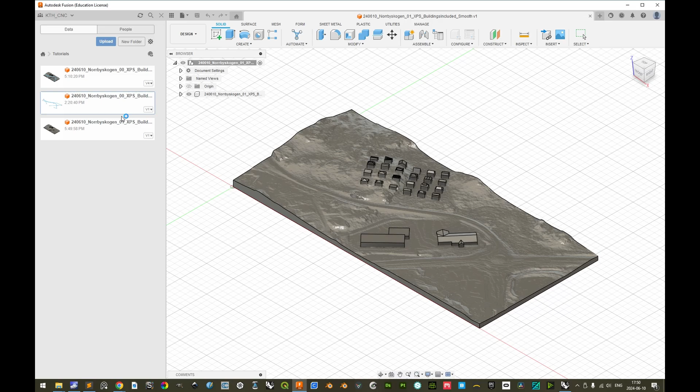So let us upload the exported file. It might take quite a while, but now it has been properly uploaded. We can double click to open it. While still in the design workspace, we can right click this previously exported and uploaded polyline document with lines to be engraved for property line and roads. So we'll insert this in the current design, and we click OK. Now we change to manufacture workspace.

We'll create a new setup. The first thing we should make sure is that the origin point is correctly placed, at the top corner, where the two axes are tangential to the edges of the stock material in the positive axis direction. So where the x-axis and y-axis both point along the edge and not where one points outward of it. So this corner here.

In the second tab, we'll make sure that stock side offset is set to 0 mm. Make sure not to change the default units in all the fields, taking care only to replace the digits that you want to replace. So let's change this to 0. Top offset can be set to 1 mm, it is sufficient. The bottom offset in this case must be set so that the total height is approximately, within 0.1 mm or so, 100 mm. So what do we need to add? 22.33.

22.33, 23 or so. When you have a material sheet such as 100 mm XPS, it is advisable not to increase the top margin excessively, instead having excess margin on the bottom, because anything that you add on top will increase the time it takes to mill and contribute to waste of material. These stock dimensions are to be taken note of, because these are the ones you prepare your physical stock to.

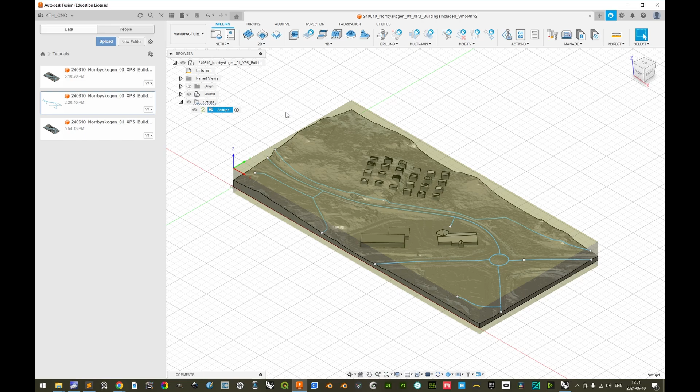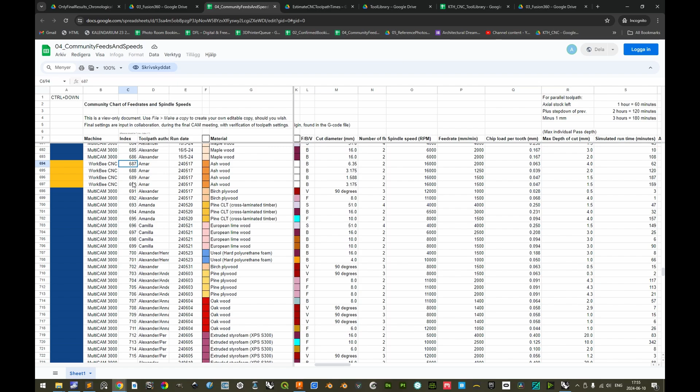Go to your preferred web browser and go to cnc.kthcnc.se. It's only a URL to a Google Drive. Here you can enter the reference photos subdirectory, and in here you can browse between the models that students previously have milled. All of these reference images have indices attached to them so that you can easily, in the Fusion 360 subfolder, the CAM software that we use, and the community feeds and speeds datasheet, find the toolpath settings that were used for a specific reference that you find of referential value to you.

In this case, we have prepared these sets of 4 toolpaths that are of great referential value for this specific set of tutorial toolpaths. So we will be using these settings for these 4 toolpaths as our initial values. We'll see if we need to tweak them. For the first toolpath, we use the router bit product ID 23, and it's a 3D adaptive toolpath. So we can go back to Fusion 360 and add a 3D adaptive clearing toolpath.

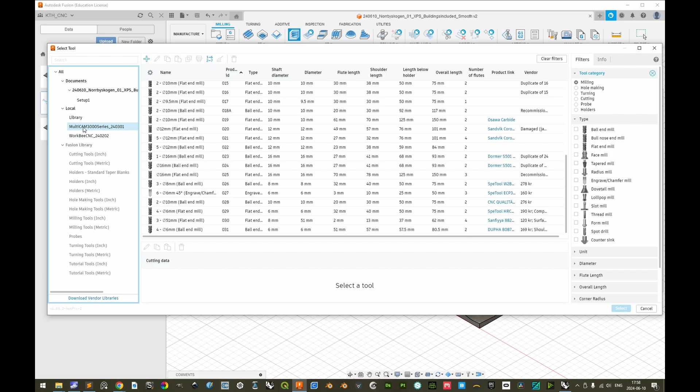We can select a tool, and having previously imported these two libraries, we can go down to the Multicam 3000 series one, number 23. Very good, this is the one. Take note here, it is fairly short, so it only has 68 mm from the tip of the tool to the bottom of the collet or tool holder. So we'll need to make sure that this tool does not extend further deep than 67 mm or so.

We can select this, and then we can see the datasheet. We can go back here to the spindle speed, the rotational speed of the spindle. We have 5000 RPM, which is the default value. That's very good. Make sure to only change, if necessary, the spindle speed, and never ever change the ramp spindle speed from the default value. The ramp spindle speed value will be erroneously interpreted by the CNC machine, and it will run amok, ramping its feed rate instead of its spindle speed. In this case, 5000 RPM as default spindle speed is good.

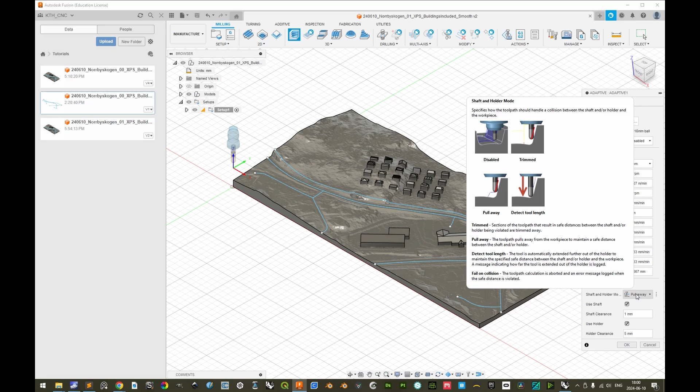The cutting feed rate we can change from 1000 to 4000. It is good procedure to only change the digits that you actually need to change instead of deleting everything here or replacing it, since a unit here should be properly retained. As per the reference, if you hold shift and scroll here, we can see that we have pull away, and we will enable shaft and holder and have pull away as the active mode, and then change the shaft clearance to 2 mm.

Thus increasing the safety margin between the non-flute shaft segments and unmilled material. We can go to the second tab, and here we don't need to change anything. We can have no machining boundary as per the reference, and we'll have rest machining active, which means that this toolpath and succeeding toolpath will work in collaboration, and the succeeding will take into account what the previous has milled away so as not to mill the same volume twice. And we see that we have rest machining here.

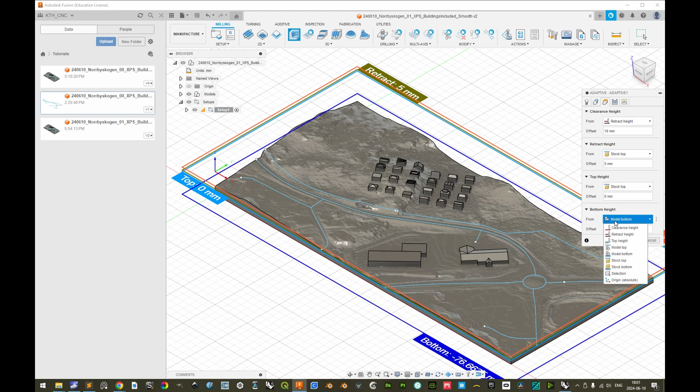We can go to heights, and here it's important that you remember that the tool distance from tip of the tool to the collet was merely 68 millimeters. So we'll need to make sure that the bottom height from the stock top is offset by no more than -67. That's 1 millimeter clearance. It's adequate.

Then we'll go to the fourth tab, and we'll make sure, since this is XPS, a type of plastic, extruded polystyrene, that we don't want to go conventional, because that would increase the risk of rubbing against the plastic, thus increasing the risk of it melting. So we'll do climb as direction, and the maximum roughing step down can be set to 20 millimeters. The fine step down here can be set to 10 millimeters. That means that we leave 10 millimeter vertical increments for the succeeding toolpath, which is okay.

We disable flat area detection. It adds very much to the computation time of the generation of the toolpath and does not serve us any purpose. As for the stock to leave, we'll make sure that we leave 4 millimeters of radial stock to leave. This will automatically, by parametrical dependency, change the axial stock to leave to 4 millimeters as well.

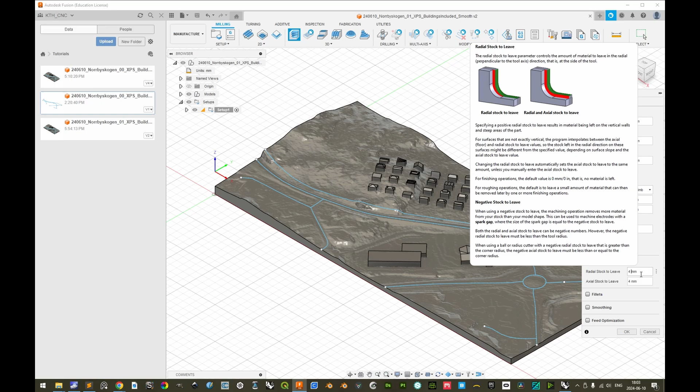When milling with a ball end mill in XPS, the surface gets very rough. And it is not a problem, because we are going to define the final surface with the succeeding toolpath, but we want to make sure that we have a sufficient margin left to the actual model, so that any potential areas which get ripped away significantly do not infringe on the actual surface.

In the fifth tab, linking, we do not need to change any settings. Those settings that we needed to change are here in the comment, so it can be good to take this reference and simply follow it. Generally, the later the reference, the more reliable it is, owing to the amassing of collective knowledge. Alright, we can click OK to generate.

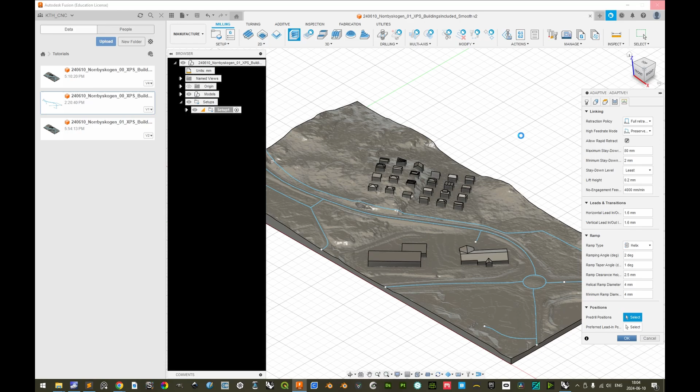Alright, this toolpath is simulated to take 1 hour and 15 minutes. The actual time it will take to mill will significantly deviate from that. The statistical maximum to be expected is a time factor of 1.8 for 3D adaptive clearing toolpaths.

If we go to Rhino and open Grasshopper, and if we go to grasshopper.kthcnc.se, and go to definitions, then fabrication, then estimate CNC toolpath times, here there is a Grasshopper definition as well as an image preview of it that you can use to more easily compile the simulated times and the expected actual times, and we'll do so now.

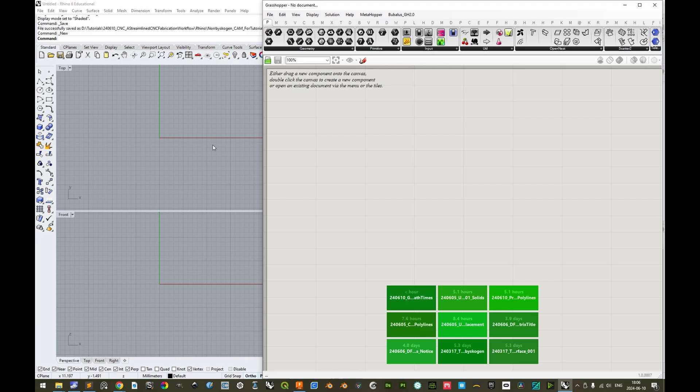So we'll simply open that, and then for the first toolpath it is 1 hour and 14 minutes. And it's a 3D adaptive clearing toolpath. So it's expected to take 2 hours and 14 minutes.

Generally, it's good that the clearing toolpath or the initial toolpath does not take more than half of the maximum allowed toolpath time of 6 hours in total, because this initial toolpath will not define the end result or the final surface, and having an excessive amount of time for the clearing of excessive material and a relatively shorter amount of time for the final surface might force the final toolpath to be significantly shortened in time.

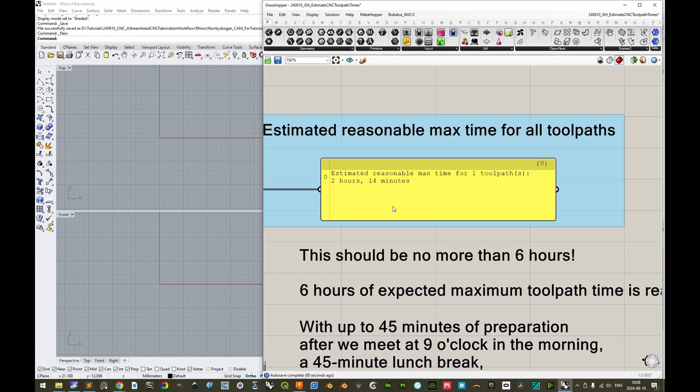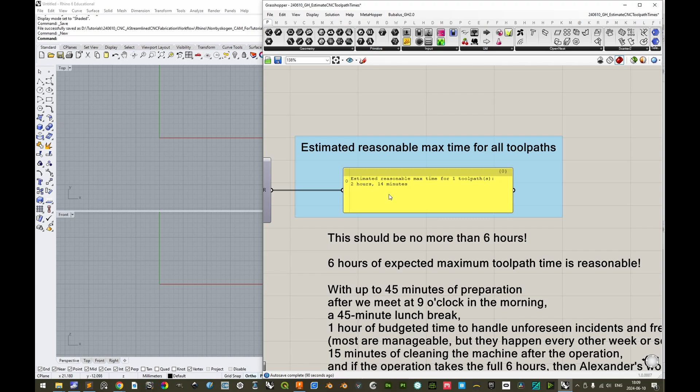So if this would have been significantly longer, perhaps more than half of 6 hours, so more than 3 hours, then it would be wise to reduce the size of the model so as to more properly define the end result with the succeeding final toolpath. Alright, but here we have it, 2 hours and 14 minutes. This first toolpath is expected to take that as a maximum actual milling time.

And then we want to do the one that actually defines the surface. And if we check the reference here, we see it is a 3D parallel one using tool product ID 19.

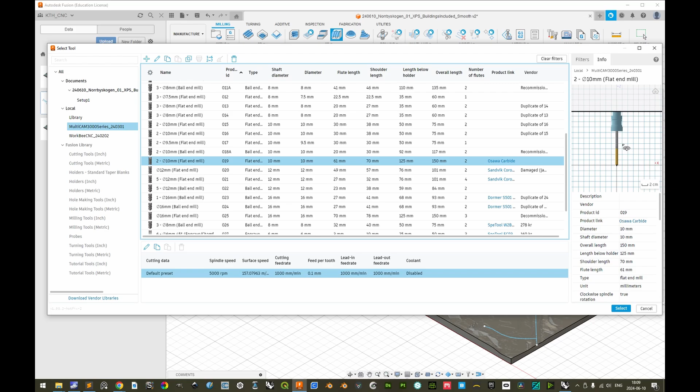So we'll go here and 3D parallel, and we'll select another tool, and we'll select from the Multicam 3000 series, tool product ID number 19. It's a very long tool with a relatively smaller diameter. It has a length below holder of 125 millimeters, so we don't need to take into account any specific bottom height restraint due to the fact that the length below the collet or the holder is more than the material itself, 100 millimeters.

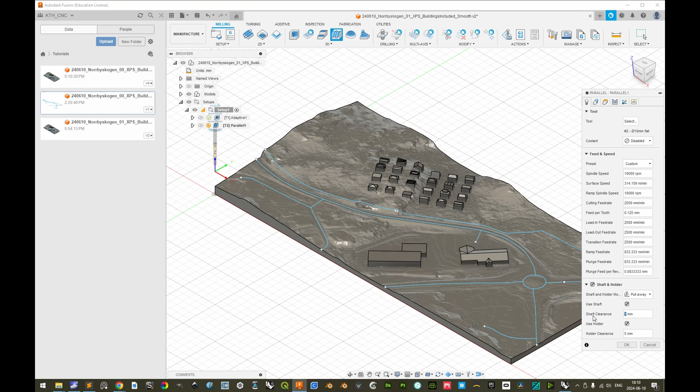We can click select. The spindle speed as per the reference should be set to 10,000 and the cutting feed rate to 2,500. It is good procedure to enable shaft and holder and making sure that it is not trimmed but pull away. In this case, we might see that the difference between the lowest point and the highest point is less than the flute length, but should they not be, we still want to activate this as a safety measure. It makes sure to generate a toolpath where the tool is pulled away from any potential collisions between shaft or holder and unmilled material. We'll go to the second tab, Geometry.

Here it's important with a 10mm tool that we have from the tool center on the boundary, which is the silhouette of the model, that we allow an additional offset of a little less than the radius. So 5 is the radius, so 4mm additional offset. This is to make sure that the tool defines as much of the total area as possible, but still not being allowed to pass past the edge, which we would have allowed it if we would do 5 or 5.5 or more. So we'll do 4 and no more.

Rest machining can be kept disabled in this case because we are following up a 3D clearing toolpath with another type of toolpath. The 3D adaptive clearing toolpath is always calculated from the top, going towards the surface, while the parallel toolpath originates from the actual surface. And if there would have been excessive material left, then one perhaps would be required to do multiple passes, but that would still be offset from the original surface. So we can leave rest machining disabled here.

In the third tab, heights, we don't need to change anything since the range of the tool is more than sufficiently long. And in the fourth tab, passes, we need to make sure that the direction is set properly. In these circumstances, it's okay to go both ways. Preferably one should go only one way, that is climb milling, so as to reduce the risk of the router bit rubbing against the plastic material when it goes the other way. But generally, and historically with this specific tool and this specific material, it has worked very well to go both ways. And going both ways will save some time, allowing us more time to decrease the step over or add perpendicular passes. So let us do both ways.

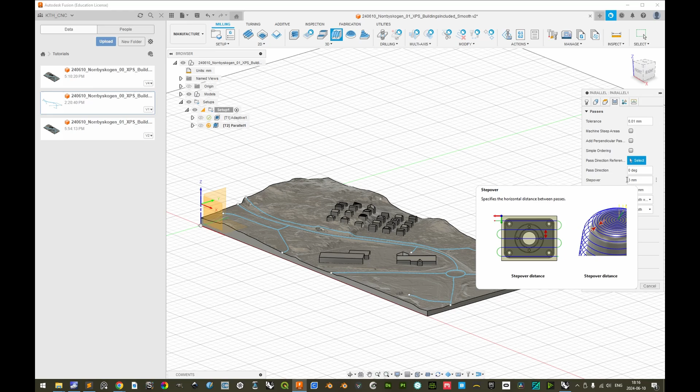As for the step over, we can actually start with a fairly high value, like 3mm, a little more than half of the radius. The good thing about authoring parallel toolpaths is that it's a very linear endeavor. If a step over of 3mm takes 3 hours, then a step over of 1.5mm will take 6 hours, etc. We'll allow it to be 3 at this initial stage, and we have no multiple depths, we have no stock to leave. And as for the multi-axis, we only have 3 axes, so we leave that as it is. For the 6th tab, linking, we leave everything as it is as well. So we'll go back to passes, 3mm step over, we click OK.

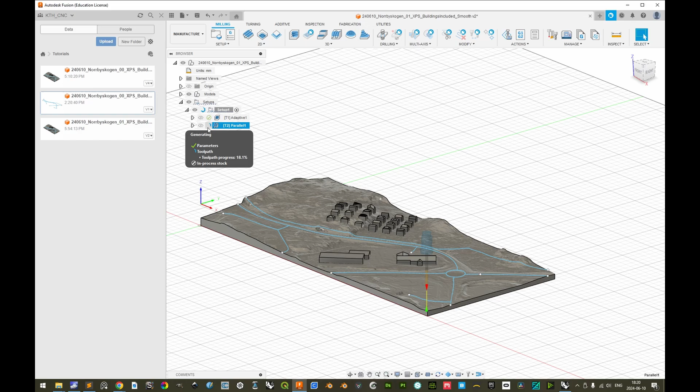And while this icon does not tell much, when you hover the mouse cursor above it, you see that we have 13.8% progress. It's not a linear thing. And now we have 18.1, so you can more properly see that it actually progresses. Alright, very good. Now we see already here an approximation of the simulated time. Let's input it into Grasshopper. So we had 1 hour and 33 minutes. And the type of toolpath is a 3D parallel and we go both ways.

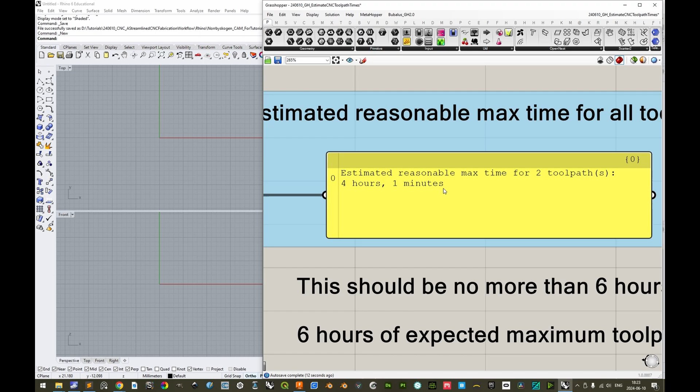So now we see here that the estimated reasonable max time for these two toolpaths is actually only 4 hours and 1 minute. So here we can actually experiment a little. We have 2 additional hours approximately that we can utilize for the second toolpath. And we see it is only 1 hour and 33 minutes, this one. So I would say that we can utilize this time at our disposal to add an additional pass.

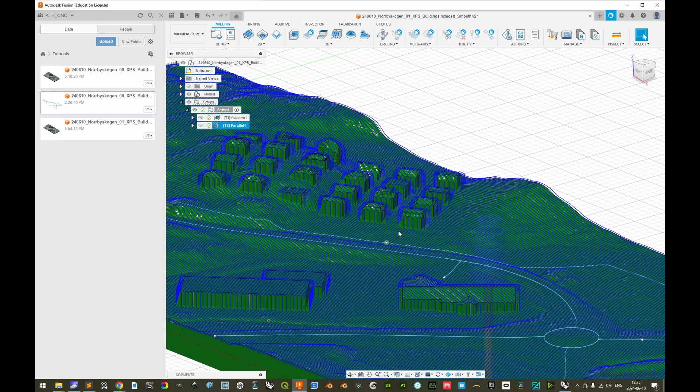You will see here, if we simulate this, go to Actions and Simulate, and then we can jump to the end of the toolpath, make sure to disable the visibility of the toolpath, make sure to enable the visibility of stock, change the colorization of the stock from operation to material, and then optionally you can change the material from ceramic to wall paint, which is a little less glossy. You can do however you want.

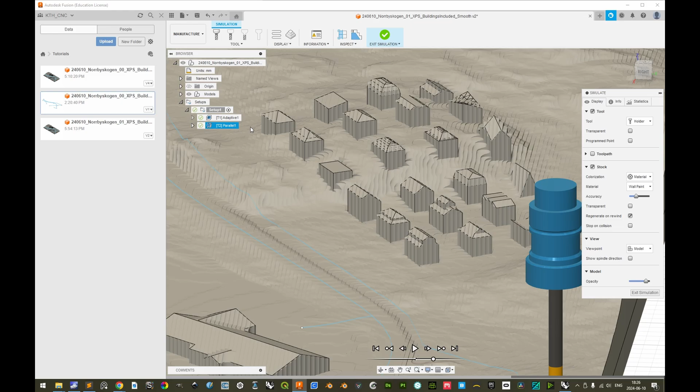But if we now hide the models, we see a resemblance to the original model, definitely. The vertical cusps are very accentuated. It is of course due to 3mm being a step over that is quite large; a step over of 2mm is more moderate, and a step over of 1mm is very fine.

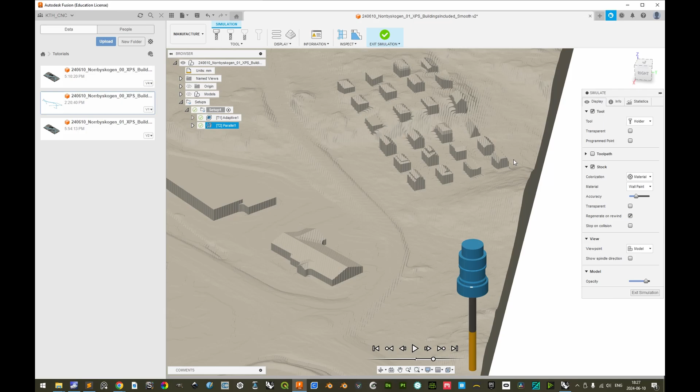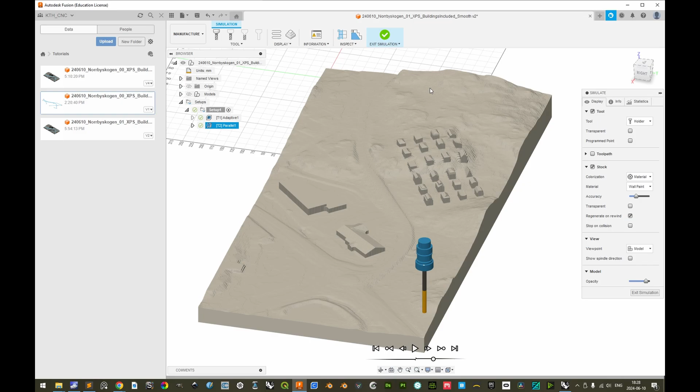But since we are using XPS, which has no direction of fibers, etc., instead of decreasing the step over, which might be a more viable option with solid wood, in this case I think that the vertical cusps will be better handled by adding a perpendicular pass. By adding a perpendicular pass, it will of course double the toolpath time, which in this case we are within budget to do. It will not change the surface of the model as much as the first pass did, but where the cusps are the most expressive, those are also the areas where a perpendicular pass does most benefits.

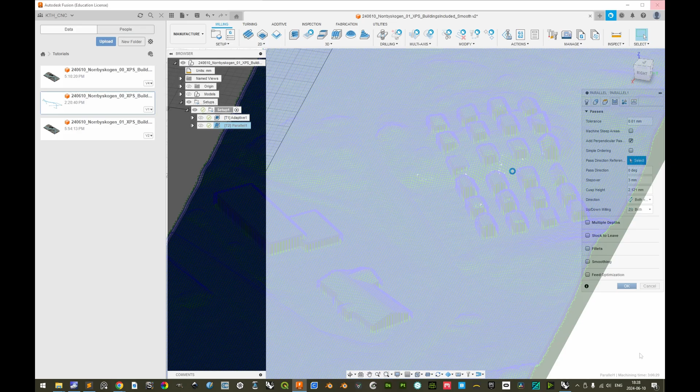So let's see, if we exit the simulation, and if we double click on the icon there so as to properly enter the settings here again, if we go to passes, the 4th tab, and add perpendicular passes, and that is the only thing that we do now, and click OK. Alright, we see here that we have an approximation of 3 hours and 6 minutes.

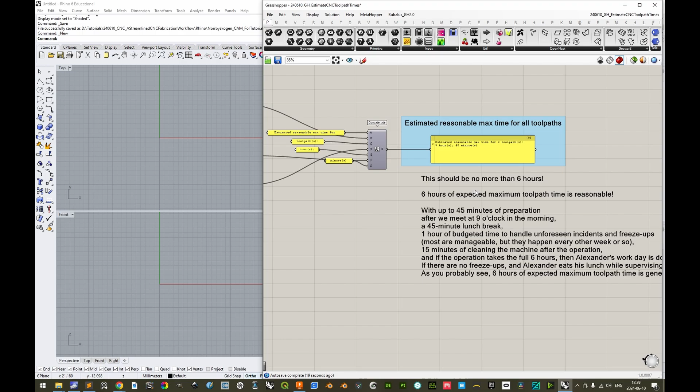So let's go back to Grasshopper, and it was 3 hours and 6 minutes. So we have 3 hours and 6 minutes. And this gives us approximately 5 hours and 48 minutes to expect as a reasonable maximum time it takes to mill. As such, we still have 12 minutes for the 2 succeeding trace toolpaths, but those generally take a very short amount of time. Very good.

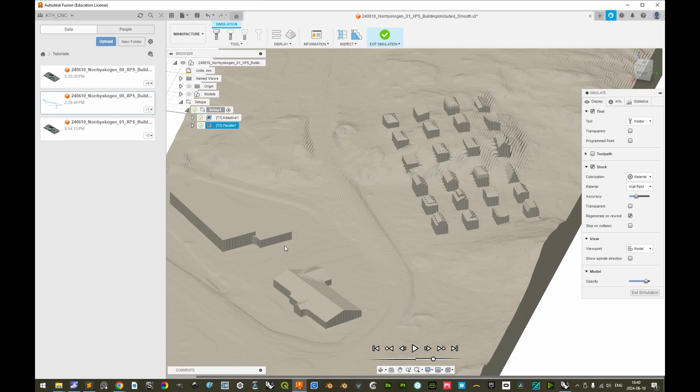Let's go back to Fusion, and we should also simulate just to verify how it looks. So let's go to end of toolpath. We will see how it starts by going parallel to the x-axis, and we see the vertical cusps that we previously saw. And we'll see now that it starts to do it along the y-axis, if it significantly improves. We saw it improving significantly or not. You'll be the judge. Whether or not the perpendicular pass was worth it in terms of improving the final surface is a question left to you.

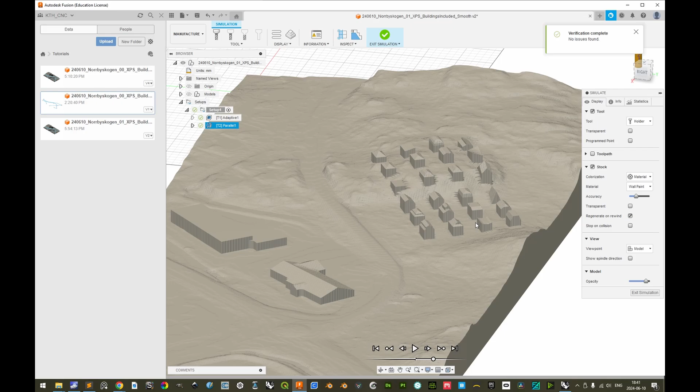The main important thing is that the toolpaths that you prepare are safe to run, that is, no critical collisions, and reasonable in time, that is, not an expected time to mill exceeding 6 hours. Let's leave it like this, it looks good. So let's exit simulation, and then we could either simulate and verify collisions now or after the 2 last toolpaths. As long as you do it, you can do it whenever in the process.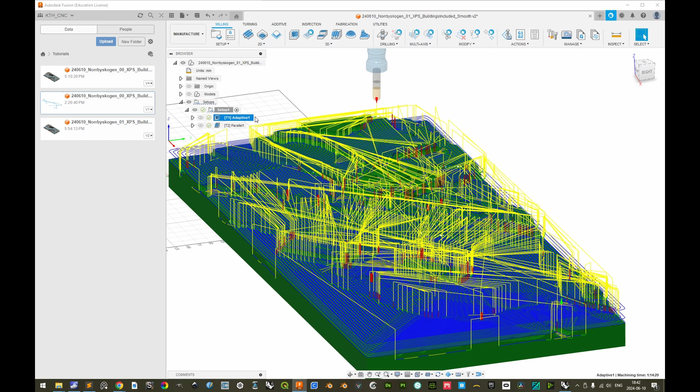If you do it early on and you identify a critical collision that you either way would have to readjust the settings or so, then it might have been beneficial. But in this case, we can simply do all 4 of them and then one after each other verify for collisions. If we show the models again, then we can actually do like this. We can open a previously authored CAM document here, and then we can copy the 2 toolpaths that we did for these very lines in that model.

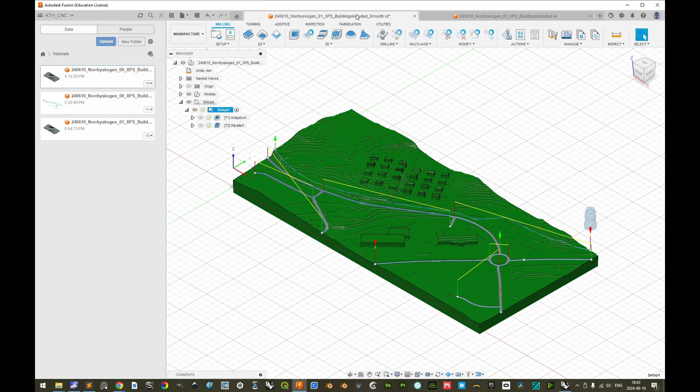So we'll double click here, and then we select this one as well as this one, and we'll right mouse button click and do copy. And then we'll go back to the previous document, and then we can right mouse button click the setup 1 here, and do paste. And here we have them. Having copied these, we can close the other document. Now we can open this 3rd toolpath, and we can make sure to delete the curve selection there, because that curve selection resided in the other file.

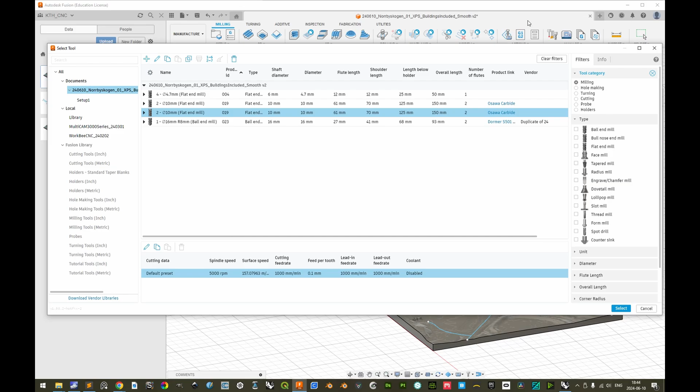And then we go to the 1st here, and this specific tracing is tracing of the roads. And we'll be using tool number 19, the very same tool that we used previously. It is shown here as a separate instance, but they are the very same. It's just because they resided in different documents initially. And then 10,000 as spindle speed is adequate, 2,500 as cutting feed rate is adequate as well.

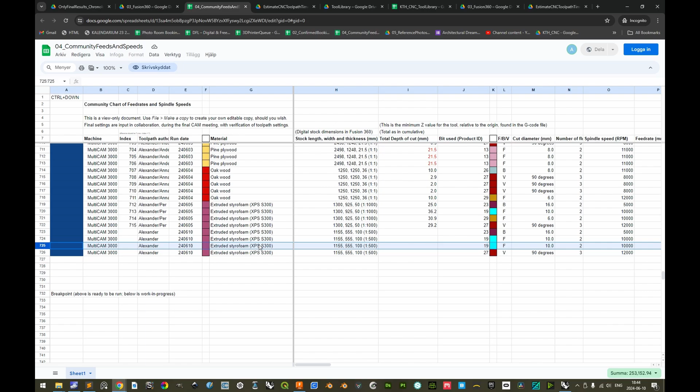We also see this if we go to the reference, and if we highlight this one, we have 10,000 and 2,500. That's the feed and speed of our reference here. And we also have a suggested axial offset of -1 millimeter.

So we'll see here, if we go to geometry and first of course select the curves, and it was the road curves, these. So let's make sure that we expand this and expand the contents of the reference document, and then expand the sketches, and then we select the roads. Very good. As for the heights, there is nothing we should change.

As for the passes in the 4th tab, here we have the axial offset of -1 millimeter. We'll see if this looks good. We can also do less than so, and in linking we don't need to change anything, so we can just go back to passes, verify that everything looks good, and click OK.

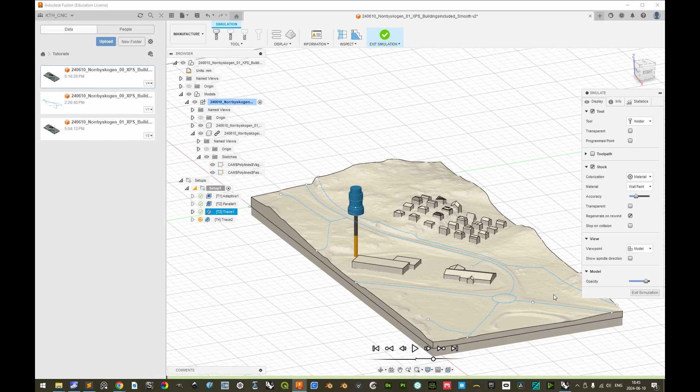Let's go to actions and simulate to see how this looks, and then we can hide temporarily all of the models, and then we can go to end of toolpath. Yes, this looks very good. Alright, we can exit simulation, and we can show the models again.

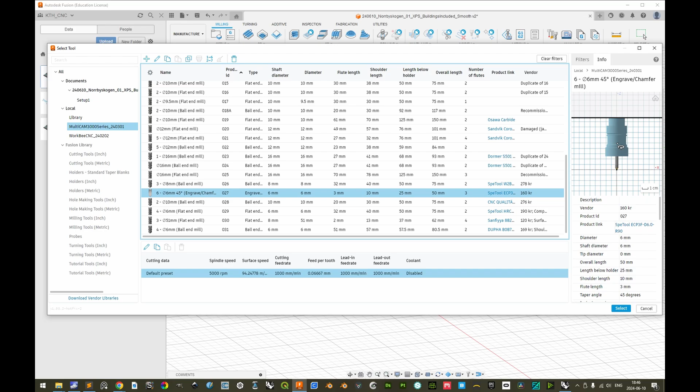And as for the 4th and final toolpath, I think that we should exchange not only the curves, we can delete those as of now, we should change the tool to a V-bit, and a V-bit we only have one of, the 45 degree one with a total of 90 degrees, and we can select this.

And then let's see here, as for the spindle speed, let's check the reference. Let's highlight the fourth and final here. We have a reference here of 12,000 RPM. So let's do 12,000 RPM. And then as for cutting feed rate, we can do 2,000.

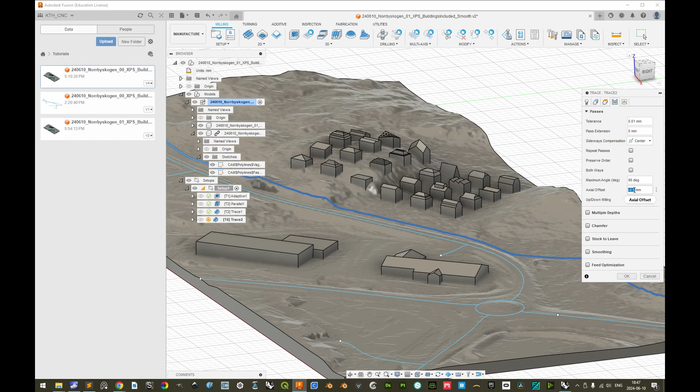And then if we select the geometry, we should select the property line. Very good. And then as for the heights, we don't need to change anything. But for the passes, here it is 0.5 millimeters descended. With a 90-degree tool, that means that the groove should be 1 millimeter in width. It also depends on the actual slope of the route it takes. So let's try negative 0.5 millimeter.

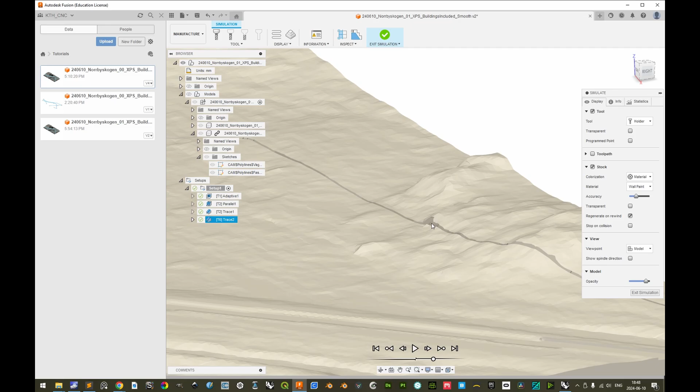Okay. And let's go to actions and simulate and jump to end of toolpath and hide the models. And here you see what I said about the slope, that when there is a significant slope, it will widen. Here, of course, it looks very accentuated because there's a different hue between the unmilled material and the milled material. In the actual result, it might not look this accentuated. The line looks good. Yeah, it's a little wider at some parts, but I would deem this definitely good enough.

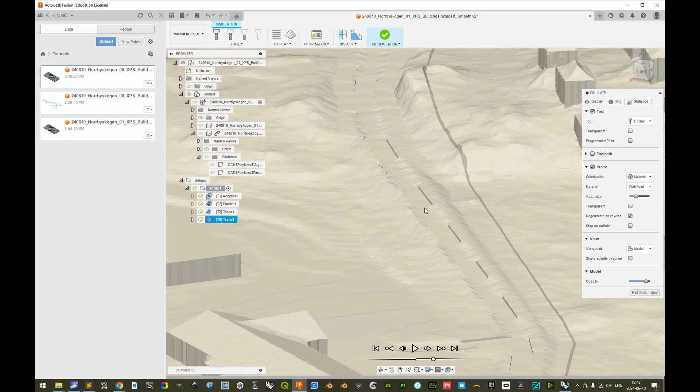When simulating individual toolpaths, the other toolpaths are significantly deteriorated. As here, you see that the road engraving with a flat end mill looks very weird. But if we actually do simulate that one and jump to end of toolpath, we see that it looks good.

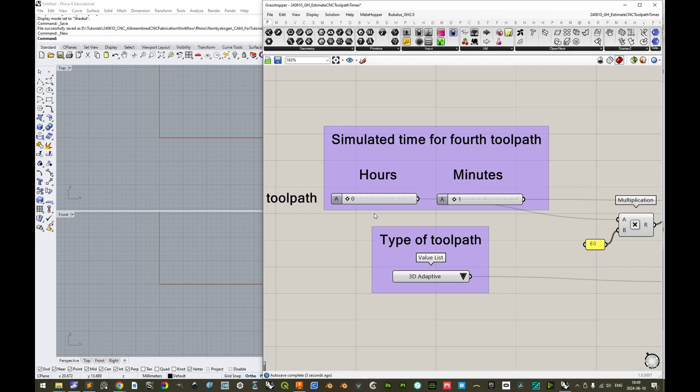Alright, let's make sure that we input also the time of this. We have 2 minutes. Only 2 minutes, and it's also a 2D operation. That's good. 2D operations have very small time deviations. And the last one was 1 minute, I think it was. Yes, and it is a 2D operation. So we have 5 hours and 51 minutes of expected reasonable max time.

That's good. That means that we can go back here and go to actions and simulate, having selected only the first one there. And we have at least one error. We want to show the issues later on. But first we can go to statistics and we see here the time it takes to mill and the machining distance. And now we can go back to info and we have as of now 20 collisions.

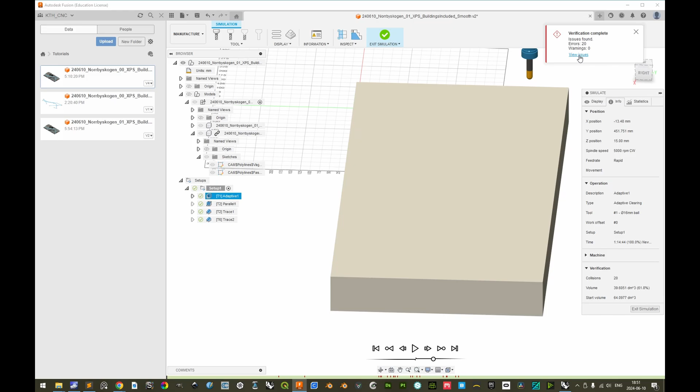We can view the issues either by clicking this link, or if this has disappeared, you can go to information and issues. And we see here that we have 20, and all of these are rapid move collisions. Fusion 360 is material agnostic and does not know what type of material we are actually milling. For Fusion 360, this might as well be solid wood, a harder material. In this case, we have a very, very soft material.

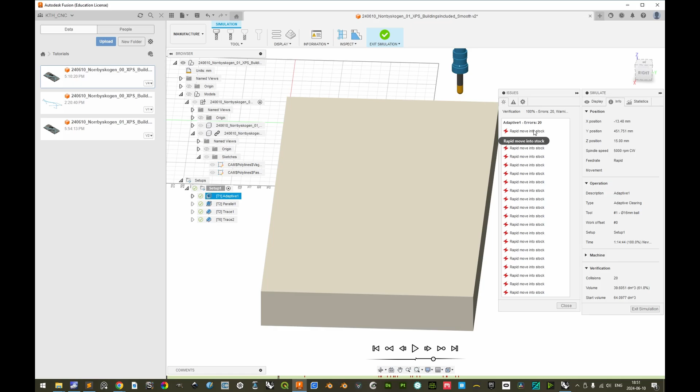If it does a rapid move into the stock, it generally is not critical, but we will need to visually verify this, of course. So let's click the first one. And I think that it's sufficient to simply look at it from like this, because if it registers a collision here, then it is the preceding movement that is the collision. And it will simply go down, and it thinks that it collides with this there, but it is not a problem at all.

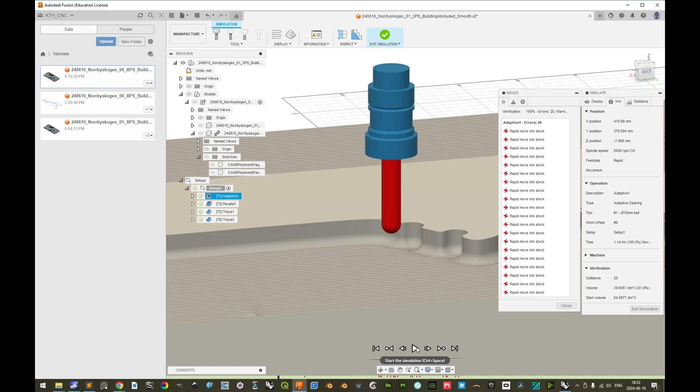That's a non-critical registered collision. And then we can move forward. That's not a problem at all. The third one, not a problem at all. Fourth one, same area, not a problem at all.

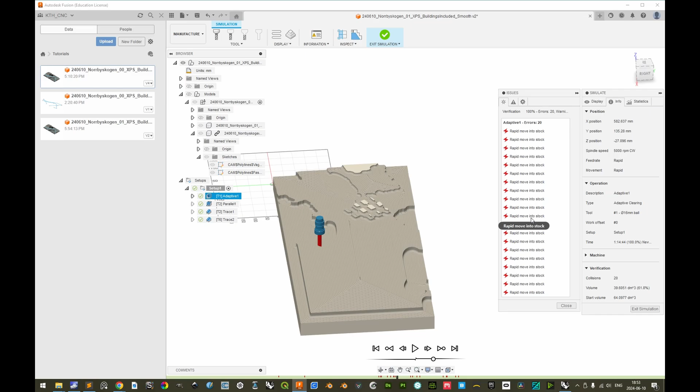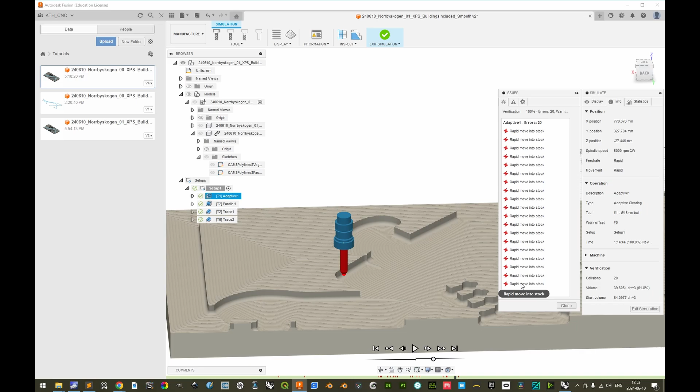Fifth one, not a problem. Sixth one, not a problem. Seventh one, not a problem... 17th one, not a problem. 18th one, I actually can't see that one. Not a problem. 19th one, not a problem. 20th one, not a problem.

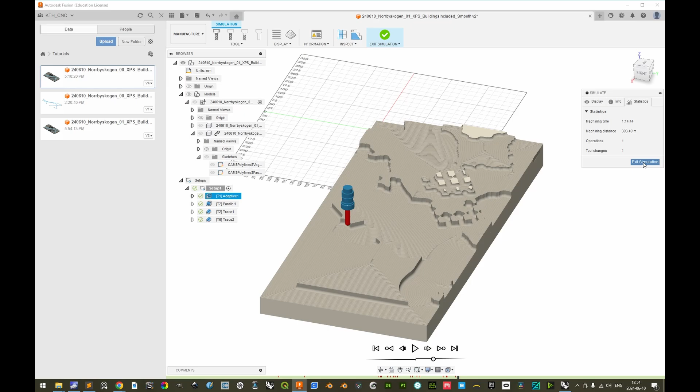Very good. So while Fusion 360 did well in registering 20 rapid moves into stock, as you see here, it is so very little that it collides with unmilled material, and the material itself is so very soft. So in this case, it's not critical at all. We can close the issues here and exit simulation, and then we'll simulate this one, the parallel one, defining the final surface, and we can go to info and wait for detected collisions.

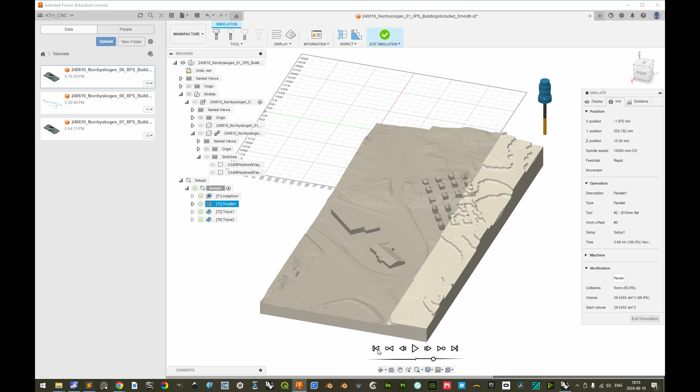We have already seen how it looks, so we don't need to jump to the end of the toolpath to see that once again. If we do, it halts the collision verification, instead focusing on doing the visual stock simulation. So I'll go back to the beginning so as to allow the collision verification to continue. And we have no registered collisions, that's very good. We have 3 hours and 7 minutes and 466.5 meters of machining distance.

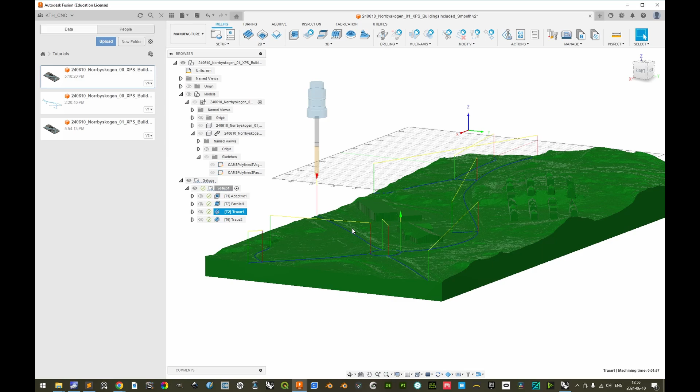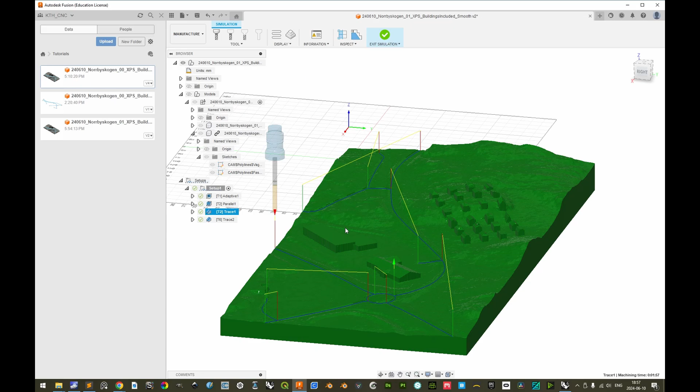We can exit simulation. And for the 2 trace operations, it is of utmost importance that you actually verify all of them. In this case, we have such a long tool that there will most probably not be any collision. But we will still have to visually verify that it progresses here along the trace lines. It's not a problem at all where it passes. Not a problem at all. Very good. All right. No collisions registered. 2 minutes. Click Exit Simulation and then visually verify the 4th and final, the 2nd of the trace operations.

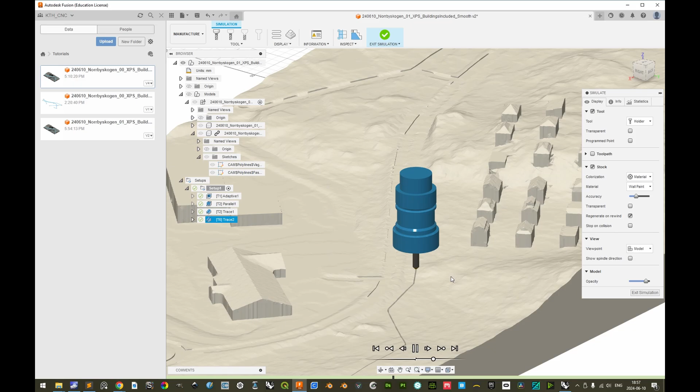Let's see here. Let's start a simulation. Oh, that was too fast for me. Let's go back and then decrease the playback speed a little. And here we see that there's no problem. Yeah, and the slope was quite aggressive, so to say. Great, that looked safe. We can exit simulation.

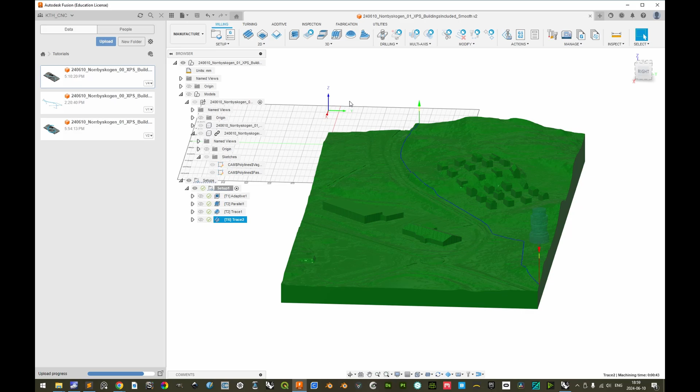We can save the file, Control S or clicking the floppy disk icon. And we don't need to change anything other than the default user saved as a description. That is only the version description for the different revisions of the document. Let's show the models again. To get an accurate preview of the simulated stock, you can select the whole setup, setup 1 here, and then you can simulate. Now you can go to the end of the toolpath and allow some time for Fusion 360 to generate the simulation of the stock.

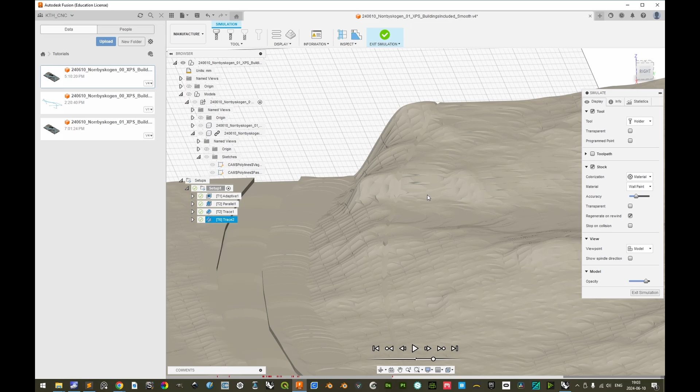We can hide the models. See here, the trace line is very, very vague, but I think it is okay. What we want is to right mouse button click the stock, then highlight stock and then save stock, and we can save it as a default name in the downloads folder here. Then we can go to that downloads folder, and here we have the exported stock, and then we can go to Rhino, and this one we have already verified is good, so we can save it and close it.

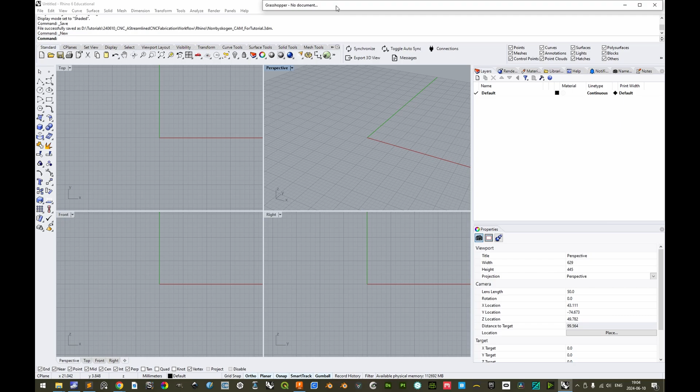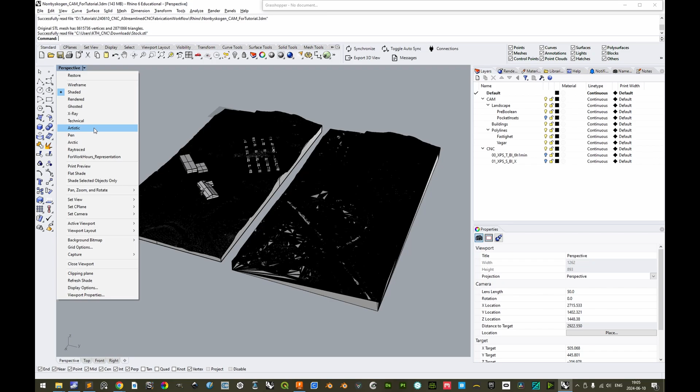And we can double click here and open the file that was our specific CAM file, and then we can actually just click and drag this in here and import it. And default STL import works fine. It should be selected by default when it is successfully imported, and then we can move it 600 millimeters in the positive y-axis, and then we can change the display mode to Arctic, and now we see more properly the engraved line here. Very good. It was more Fusion 360's lack of proper shading.

Alright, this looks good. And one can clearly see the relationship between the original 3D model and the simulated CNC fabricated one. This CNC fabricated model is expected to take 5 hours and 51 minutes to CNC fabricate. And if we select it here and change that there, that can be compared to this one that also takes approximately 6 hours, which has a different language, and you'll be the judge as to which one is the best representation of the site.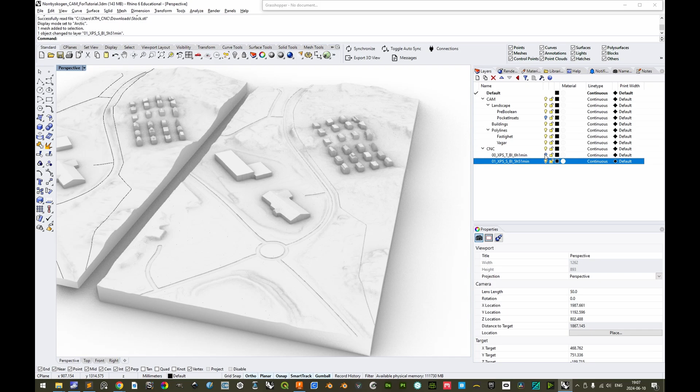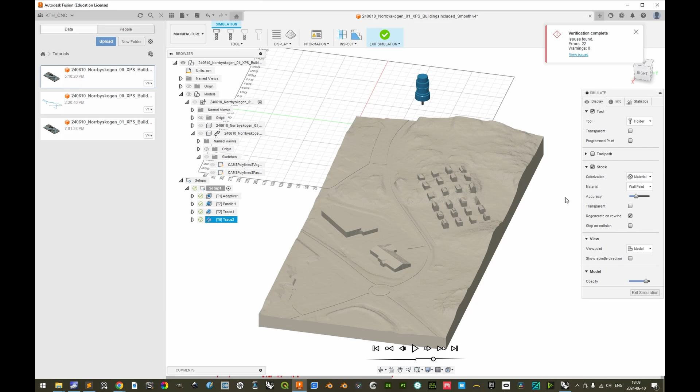Nevertheless, one of the two might be what you personally prefer, and as long as the toolpaths are safe to run with no critical collisions and within a reasonable time of a maximum of 6 hours, both are totally fine. Let's go back to Fusion 360. These issues we have already verified. It was in the first toolpath. We can exit simulation, and then we can separately export the toolpaths.

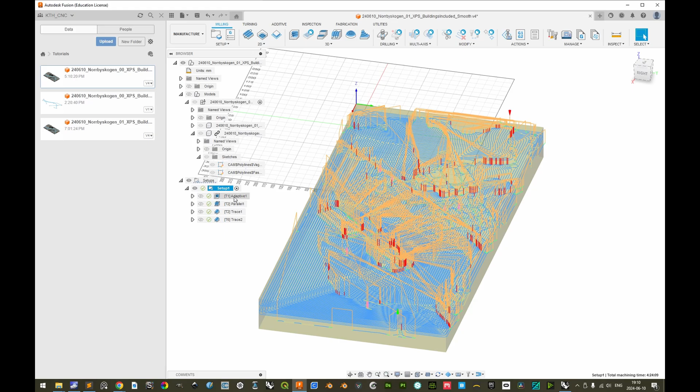While it is possible to export all of the toolpaths in one combined file, since the CNC machine perhaps once every 2 weeks freezes up during operation and the toolpath will need to be restarted or manually split, it is advisable to separately export them as individual toolpaths. So select the first one, go to Actions and Post-Process. As for the post-processor, make sure to choose from Library the one that you have already downloaded and imported. Make sure not to update these post processors, because that would overwrite the custom changes made to the previous version that functions as it should. So we can select that one.

The output folder can be changed by clicking the select output folder icon here. Make sure that it is somewhere where you actually can find the file. And then as for the name, it's quite a strict syntax. It's due to the fact that the CNC controller will not accept file names with special symbols or even spaces or periods. And also only a dozen and a half or so characters are showing in the CNC controller. It's quite a restricted interface. So start with the intended milling date in a big endian style.

So if we do 240611 underscore the first toolpath in this case, and then you can just check here which tool holder the tool should be residing in. T1, tool holder 1. And then after this you can add a suffix of your choice. Just make sure not to have any spaces or punctuation or special symbols. So we can do Norrbyskogen, buildings included, and this is the smooth model. And then, before clicking post here, you can Control A to select everything and Control C to copy, because that will make it easier when you do the rest. Alright, so click post. And here you see that it has been successfully posted.

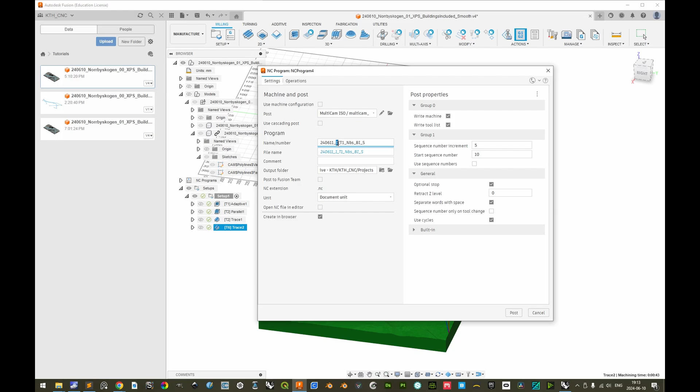And then for the fourth and final, we'll do post process again and Control V. And then we can change this to 4 and tool holder 6. And that is sufficient. And then click post. Very, very good. With all 4 toolpaths verified to be safe to run, with no critical collisions, and with a reasonable expected time to mill.

Having all 4 of them post-processed and exported, it is appreciated if you upload these 4 toolpaths to a temporary storage folder. If we go to cnc.kthcnc.se, it's only a URL to a Google Drive, and if you enter the temporary storage folder here, then you can create a new folder. We can call this tutorial, but you can type your name. And then you can enter it, and then you can go to where you exported your 4 toolpaths, and you can just click and drag them here.

This makes it really easy to simply download from this folder the toolpaths to the computer that is serving as a server for the CNC. When you have done so, you are finished with the preparations of the digital toolpaths and can focus on preparing your physical stock. Thank you for your time.